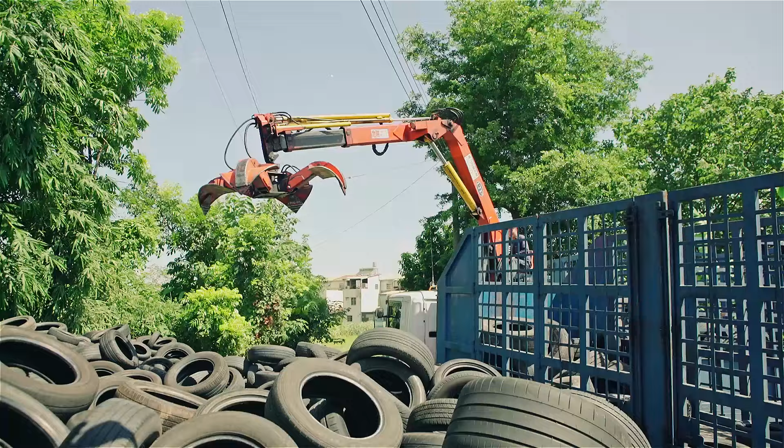Our planet is currently facing serious environmental issues. Many industrial wastes cannot be decomposed. These non-biodegradable used tires are sitting around posing a serious threat to our environment.

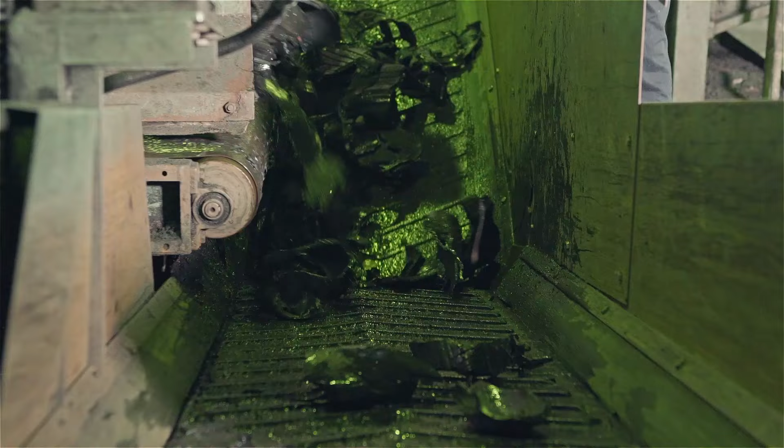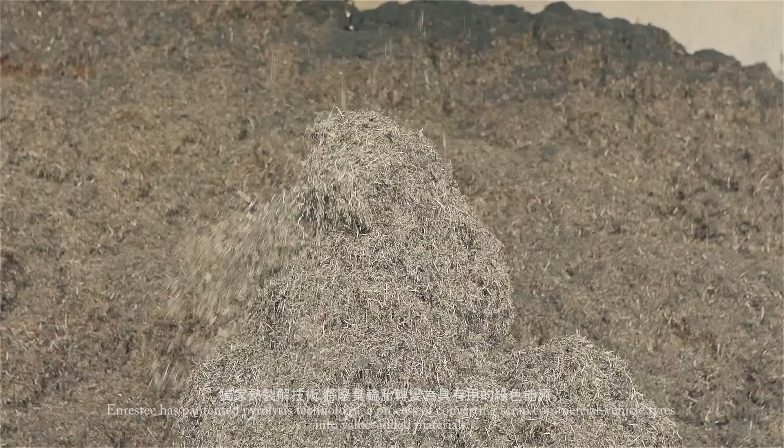Enrestec has patented pyrolysis technology, a process of converting scrap commercial vehicle tires into value-added materials, such as carbon black char, biofuel, wire, and steam.

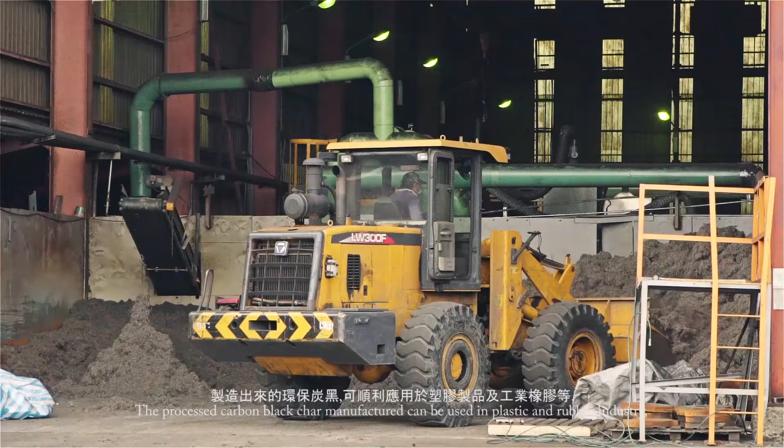The processed carbon black char manufactured can be used in the plastic and rubber industry. Not only will it significantly reduce the cost of manufacturing raw materials, but it will also reduce carbon dioxide emissions, creating a sustainable green energy ecosystem.

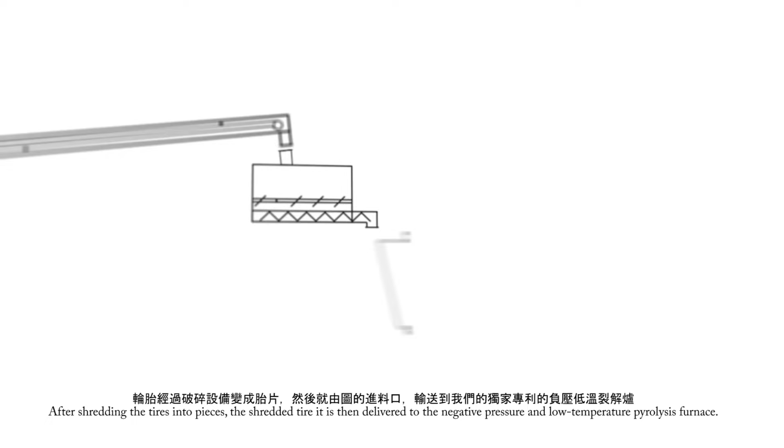After shredding the tires into pieces, the shredded tire is then delivered to the negative pressure, low temperature pyrolysis furnace. The process takes around an hour long to produce oil and carbon black.

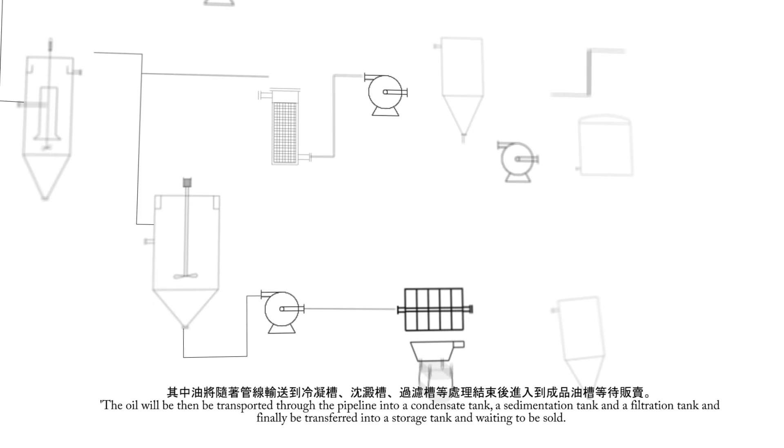The oil will then be transported through the pipeline into a condensate tank, a sedimentation tank, and a filtration tank, and finally be transferred into a storage tank waiting to be sold.

The carbon black will go through stages of processes, which include magnetic separation, grinding, and pelleting, which will then create the finished product, the pyrolysis carbon black, also known as RCB.

Additional oil will be delivered directly to the boiler to go through a combustion process, which will then be turned into steam and be delivered as a heat source for the neighboring factories.

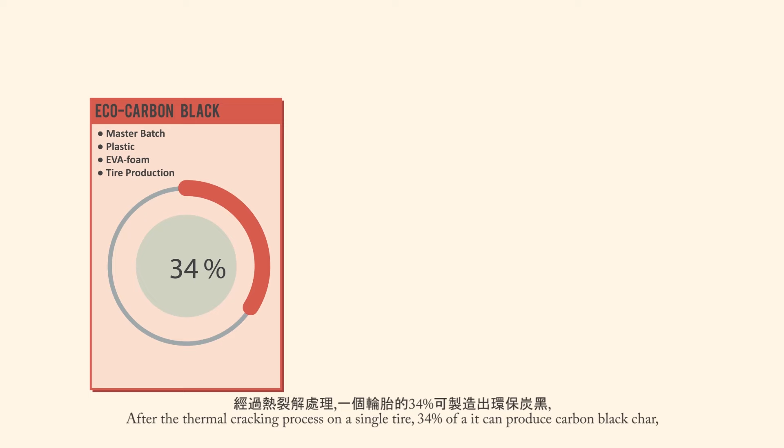After the thermal cracking process on a single tire, 34% of it can produce carbon black char, while 37% of a tire can become renewable energy for oil. The rest, 13%, can then be made into steel, and the remaining 16% can become non-condensable gas.

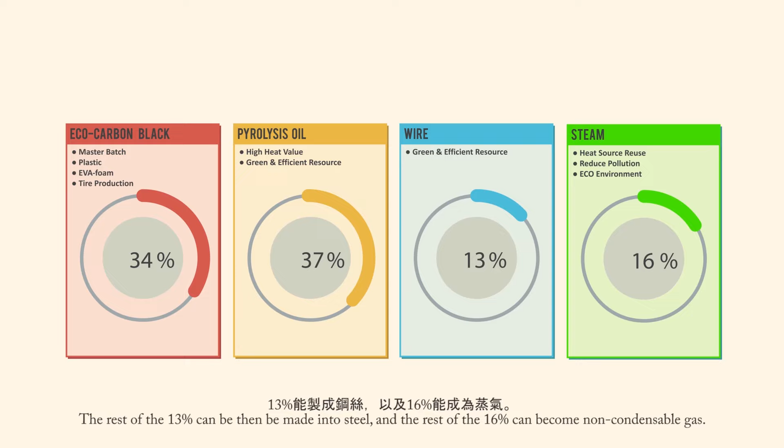If the reprocessed carbon black char meets the carbon standard, it can then be used in plastics, inks, and rubber-related products. It can even be used as one of the raw materials to produce new tires.

The non-condensable gas can be used by nearby tire factories and chemical plants.

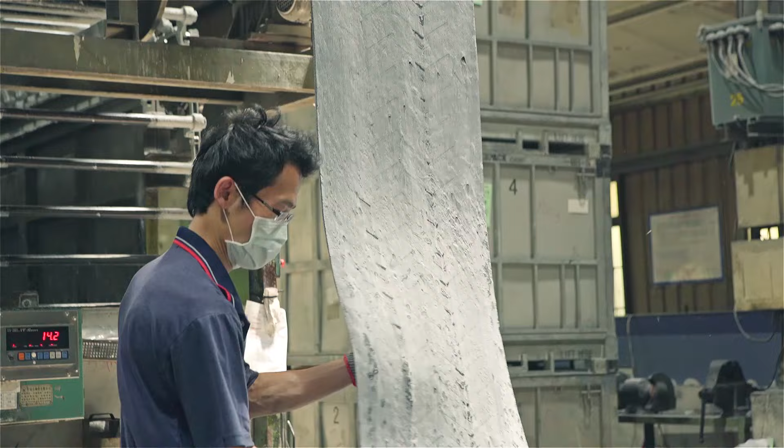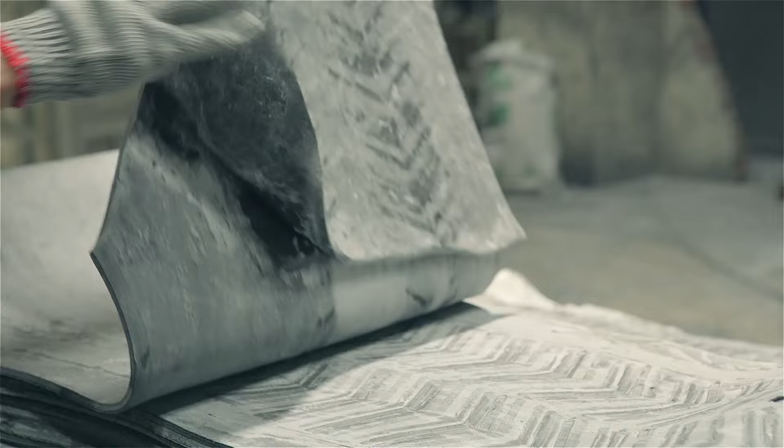There are already a few tire factories in Taiwan that officially use the recycled materials provided by Restech.

Through patented technology processes, Restech links up the sales and application of these value-added materials to the market at large, creating a new sustainable energy chain.

We are all responsible for maintaining the environment for our future generation.